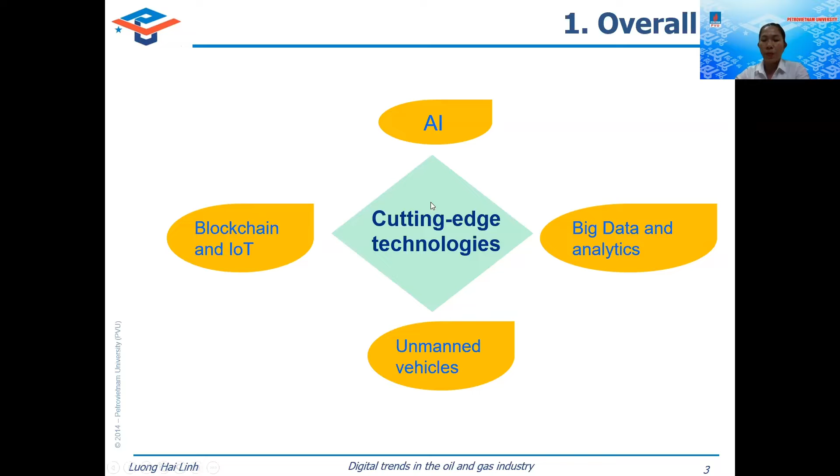Now, as oil price and oil demand are falling, the COVID-19 pandemic is exacerbating the situation, and long-term challenges such as working agendas, budgets, and climate change are overwhelming to the oil and gas industry. So oil and gas enterprises have many pressures and opportunities to improve efficiency and reduce production costs. Through the greater adoption of digital platforms and digital applications, along with the field data generated from existing infrastructure, oil and gas businesses will have a better chance of overcoming the challenges of the future and helping the oil and gas industry continue to develop.

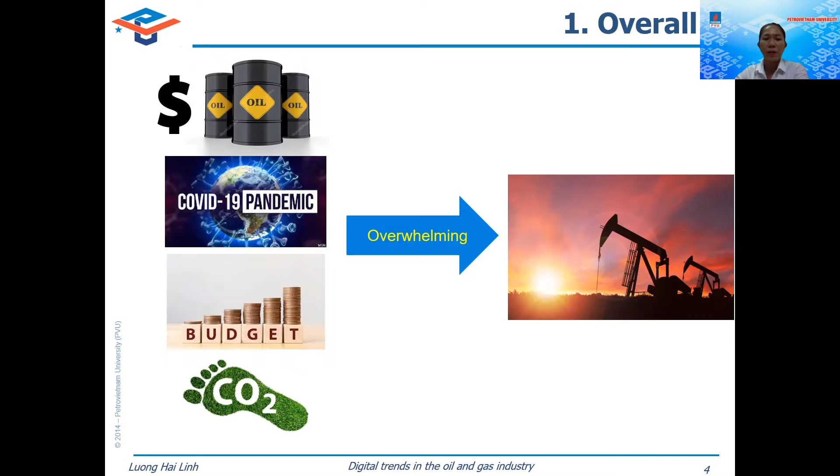So here we have concrete numbers to show obvious benefits of digital transformation, both economical and environmental. According to the analysis of the World Economic Forum in the period 2016 to 2025, digital transformation can generate about $1 trillion for oil and gas companies and contribute about $640 billion to society. Moreover, environmental benefits include reducing emissions of about 1,300 million tons of carbon dioxide, saving about 800 million gallons of water, and avoiding oil spills equivalent to about 230,000 barrels of oil.

So here we can see 6 main benefits of digital transformation in the oil and gas industry: opening up new business opportunities, increasing profitability from capital, improving operational efficiency, managing an aging workforce, and reducing safety costs. And the last one is a quick response to market fluctuations.

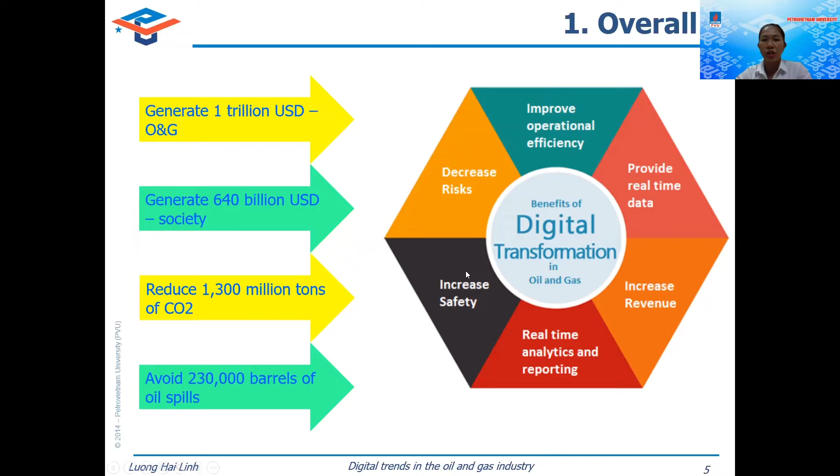So how about the digital trends in the oil and gas industry all over the world? In figure 1, showing investment in digital technologies, we can see that oil and gas companies invested the most in mobile devices in 2016, about 57%, while over the next 5 years, big data and analytics are the trend to be invested the most, about 38%.

Oil and gas companies have invested heavily in fully integrating mobile devices into everyday operations. The major benefits of this integration include workflow improvement from better group communication, increased worker productivity, and better recording of field data. Mobile technology also allows for real-time data monitoring through specialized software on smartphones, and it can have a positive impact on health, safety, and the environment.

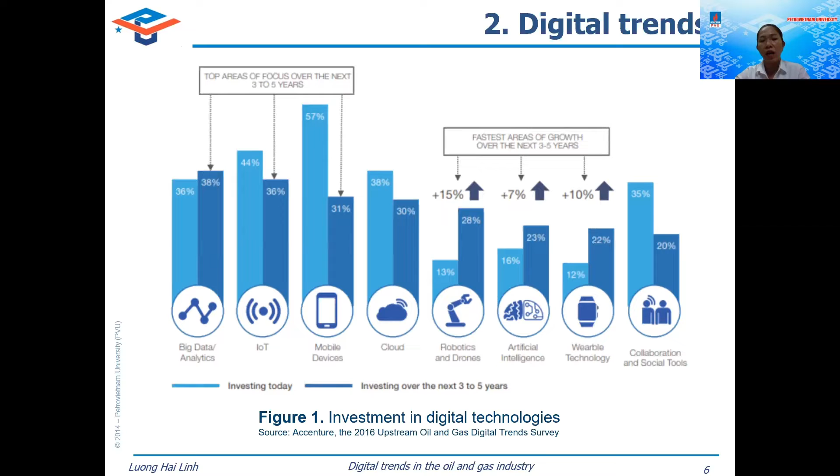Big data and analytics are of great interest in the near future because of cheaper cost and higher computing power. As we know, modern offshore drilling platforms have about 80,000 sensors that can generate 15 million gigabytes of data during the asset's lifetime. So big data and analytics will help oil and gas companies navigate this huge amount of data.

In the first stage of the journey, companies mechanize the process using hydraulic, pneumatic, or electrical control systems. This phase allows players to anticipate and prepare for failures and unusual conditions. The journey then progresses to capturing information from the physical world by sensorizing equipment and transmitting data generated in the field using IT networks. By doing this, an oil and gas company may be able to respond to field conditions and monitor operations remotely.

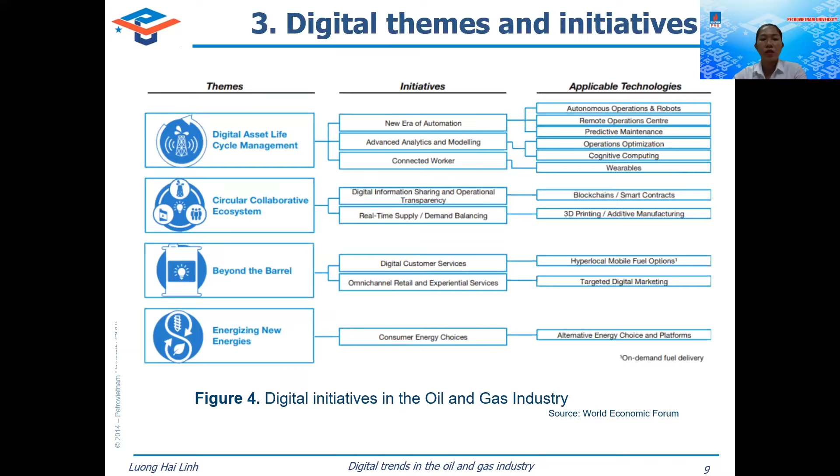And here, as I said before, lower oil prices continue to hamper margins. The oil and gas industry is facing intense pressure to improve operational efficiency. So the new era of automation digital initiatives is built on the application of different technologies like robots, drones, and the development of capability for autonomous and remote operations.

And as we can see, here are some case studies of the new era of automation, such as the robotic drilling system of energy technology in figure 5, and cognitive computing in upstream operations of Repsol in figure 6.

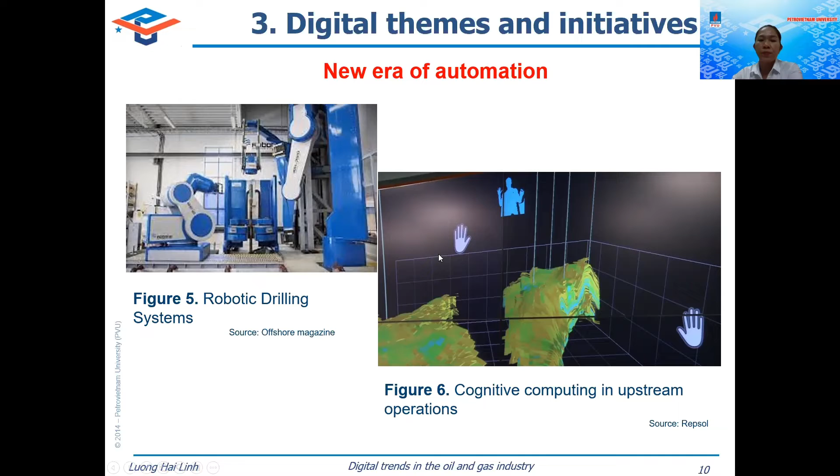Using predictive maintenance to anticipate critical equipment failures, as seen at Apache Corporation in figure 7, and the intelligent pipeline technology of Columbia Pipeline Group in figure 8.

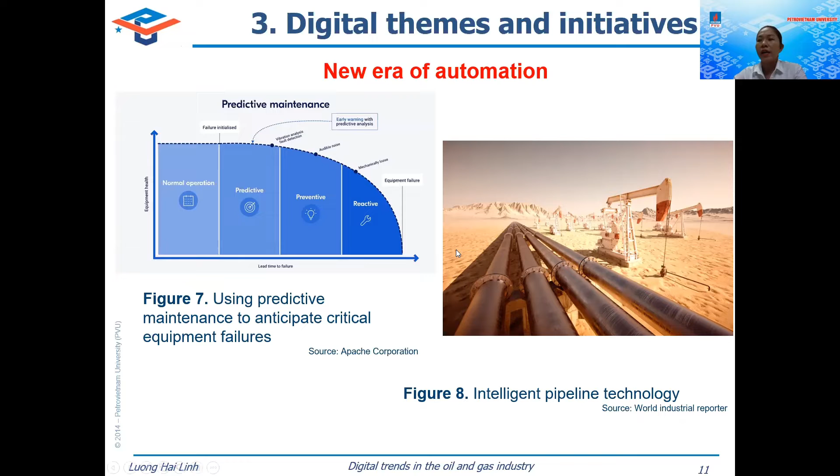Moreover, wireless sensors and personal monitoring systems that indicate when a worker is in danger continue to evolve and improve. Connected workers are employees who are not only empowered with wearables, smartphones, or connected products, but also able to fully exploit the data the device produces to carry out their jobs as safely and efficiently as possible.

We can see a case study of Schlumberger piloting the use of wearables based on Google Glass to improve the safety and productivity of field employees. Or we can look at consumer energy choice in energizing new energy.

For example, Tesla with the Powerwall, storing electricity with Powerwall.

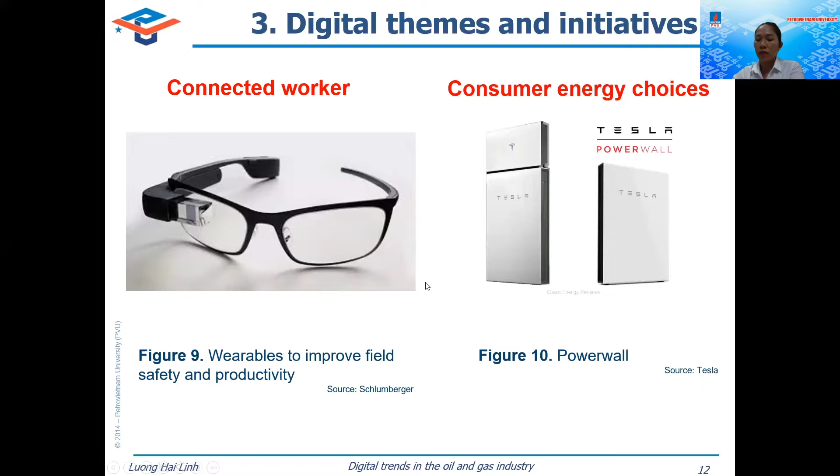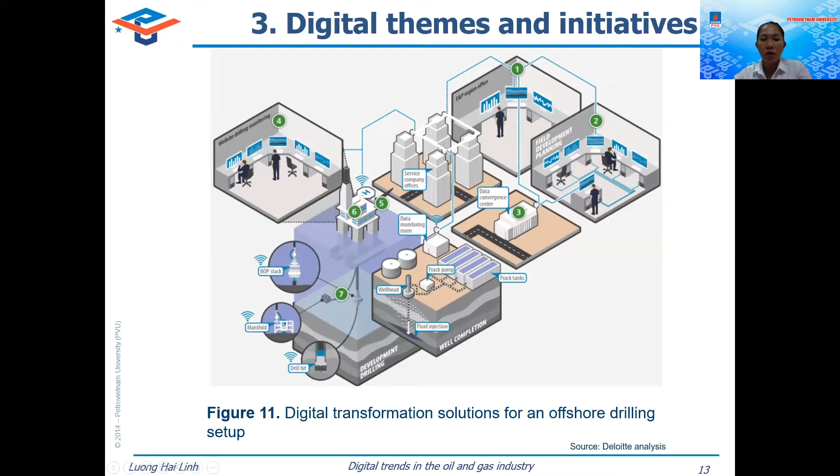So after going through the overview of digital transformation, as well as the DOT models and ideas applied in the oil and gas industry around the world, here are a few suggestions for digital transformation in Vietnam's oil and gas industry.

Stemming from the above analysis, the big orientation in the exploration field in Vietnam is to focus on building a data center for exploration and production. This center needs to fully integrate geological and geophysical data, and also develop spatial analysis tools, applying artificial intelligence and machine learning to optimize the location of exploratory drilling objects in order to reduce risks.

For new production assets, we need to consider the design of a sensor system that collects full field information and conducts analysis. If the field's properties allow, it should be classified according to profitability, with the field having the potential to bring high benefit when optimized. It is possible to consider modernization, installing more sensors for data collection and processing.

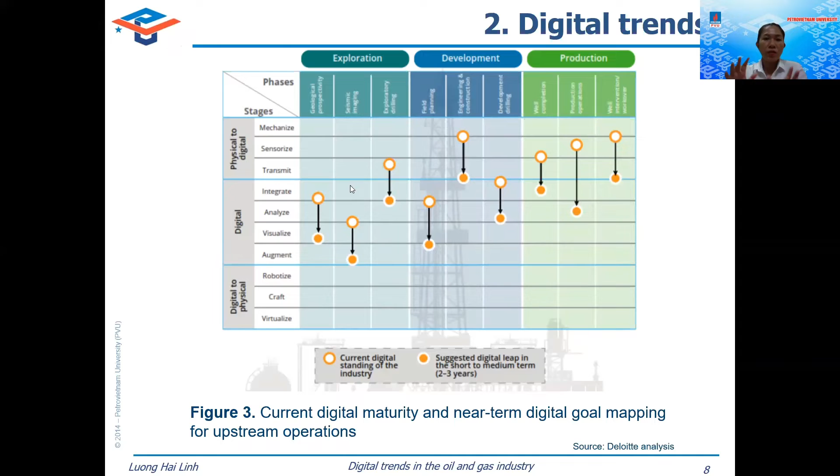Okay, thank you. So, talking about the example of film digitizing the physical asset. As I said before, we have 3 main stages, and the last one is digital to physical. So an oil and gas company could optimize its physical operating environment and adopt new capital models in these 3 stages.

With the stage robotized, we deal with problems such as tough, riskier operating environments in offshore locations, such as rigs, platforms, FPSOs, or underwater installations. The solution here is robotization of platforms. An example is Woodside Petroleum, which is combining its cognitive science technology with NASA's humanoid robotic system, using it to ultimately design offshore facilities for robot-only interventions and operations.

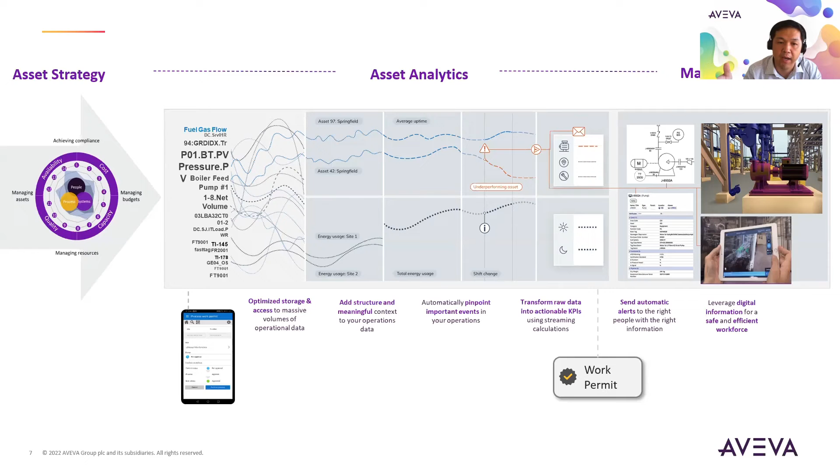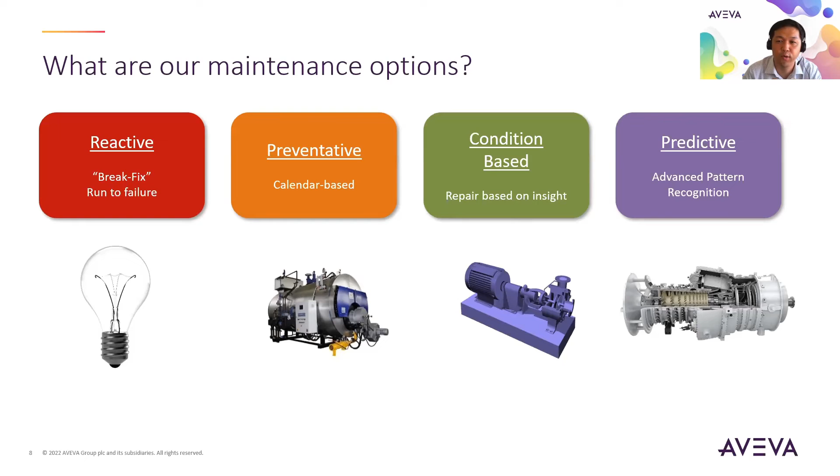Once you have data on the assets you're monitoring available in an accurate manner, we can look at changing or modifying your maintenance routine based on the condition monitoring of those assets. When you've collected enough data on particular assets, we can supply that data into an advanced pattern recognition application that gives you potential faults that could happen in the future. So you can incorporate that into your strategy, so you don't have to over-maintain or under-maintain, which would otherwise give you either downtime costs or absorbing maintenance costs.

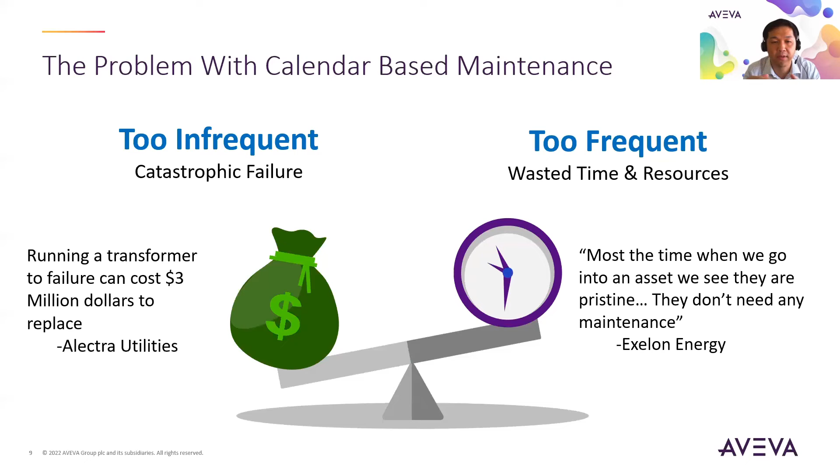If you haven't moved into conditional-based maintenance, or CBM, this is the challenge you face with calendar-based maintenance. You're looking at either too infrequent maintenance, which leads to catastrophic failure and massive downtime that could cost millions of dollars to replace and bring the operation back up, or too frequent maintenance, which is sometimes just a waste of time and resources on assets that run perfectly fine, where you're doing maintenance and bringing it down for safety or preventative reasons. This is the balance we're trying to strike with our customers - what is enough? That's the key question we look at by utilizing the software and the data they have.

So this is really what we're trying to find - the sweet spot for our customers to reduce maintenance costs, to find the middle point where there's enough maintenance for the assets to run perfectly, for the equipment to run smoothly, reducing downtime to a minimum, as well as improving overall equipment efficiency, or OEE, so the equipment can perform at maximum capacity to drive the best business value.

At the same time, we're capturing the knowledge of the assets along with the aging workforce, where we can use data to simulate what the equipment will be running, and allow the next generation workforce to come in and learn about the equipment without actually being around it. So that's essentially what we're trying to drive with this product.

So what I'll do is give you an example of what we do with our analytics. Under AVEVA, we have a lot of interfaces and connectors that allow us to connect to the data source in the control layer. This is not restricted to oil and gas - we have connectors for common protocols such as PLCs, OPC servers, and also some IoT devices.

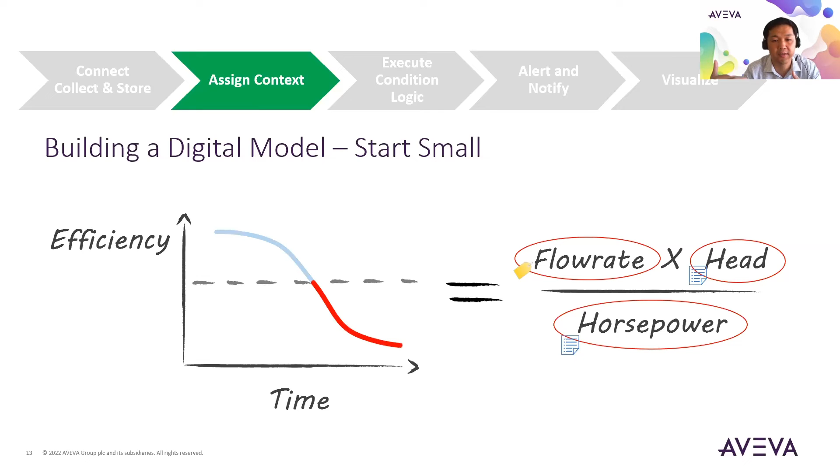And that's quite important to us. We want to build that into a logic, as well as a template that can apply across multiple assets of the same type or the same manufacturer.

So over here, we're basically looking at a pump template with the attribute and property of the status of the pump, which includes the runtime, how long it has been running. And then we also have the data coming from the plant, which is discharge flow rate, as well as the OEM data that comes from the total heads, as well as the horsepower that it can produce.

And with these parameters, we'll be able to calculate how long the pump has been running and what is the efficiency over time.

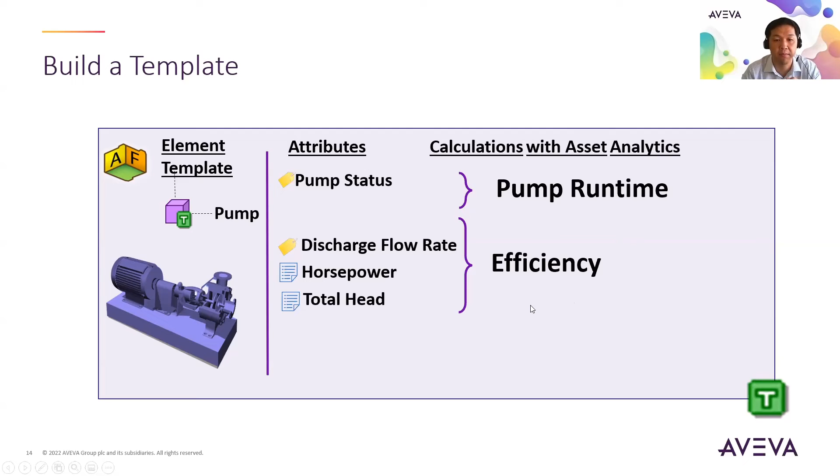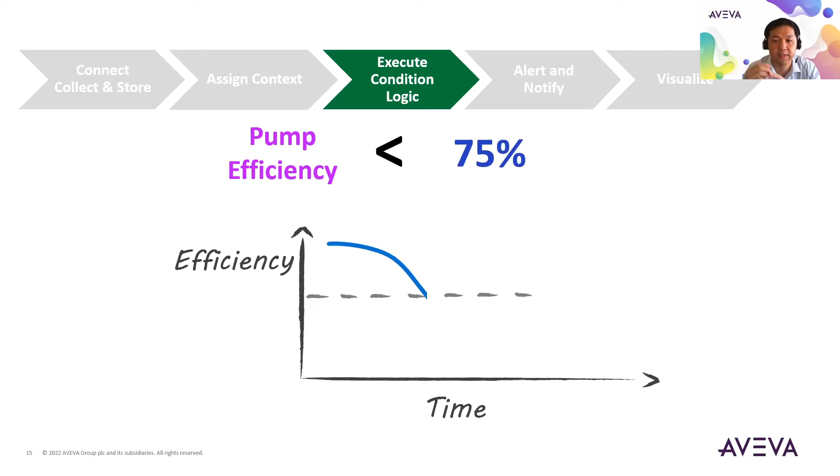So once we have that calculation built into the PI System, we can actually design or create a pump efficiency as a threshold or set point, where we monitor this particular equipment's efficiency until it drops below 75%.

And then when that happens, we are looking at capturing that particular time and bookmarking that time where it's considered a PI event frame when the equipment has been performing under what it should be.

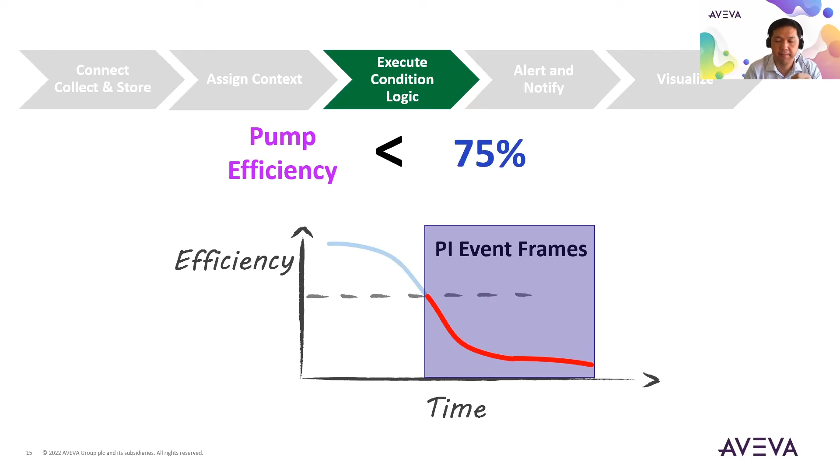And then writing the logic is really simple, using the element or the template that we have as pump 01. We've used the attributes pump status, the flow rate, and the horsepower and total heads, and produced the analytics that includes the run hour, how long it's been running, and what's the pump efficiency in real time.

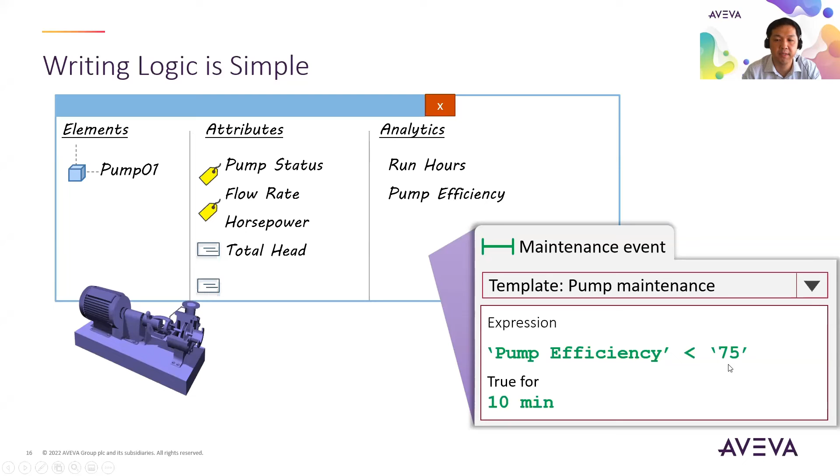And then through the event frame we are looking at the expression of pump efficiency. It goes below 75%, and if it's true for 10 minutes, we will capture that event. That's basically how we build a digital model and execute the logic behind the model.

And then final stage, when this does happen, we want to notify someone to look into it, or notify a system to look into it as well.

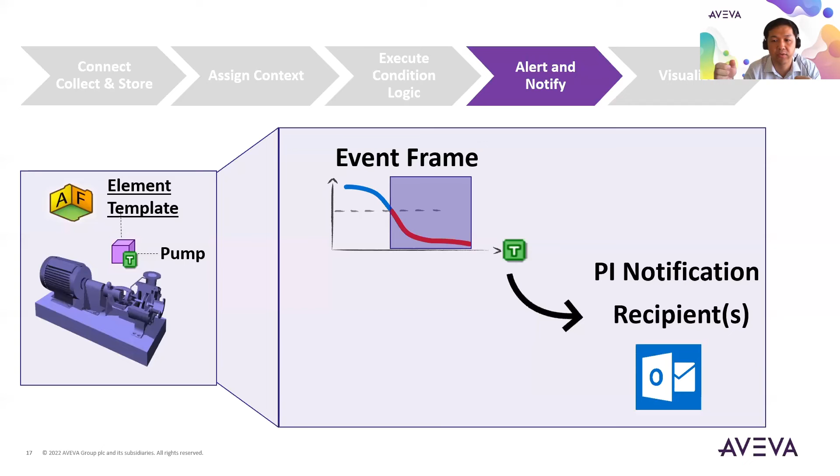And once we build this logic and the model together, we apply the template to all similar assets. This basically propagates through all the assets that you have of the same type of equipment. Then you have a whole fleet that's being monitored by a single template that's based on the same digital model, as well as the algorithm that monitors the efficiency of this.

And going a bit further, we are using the notifications that contain specific data to the assets and pass that information to a computerized maintenance management system, that could be SAP or IBM Maximo, where it actually stores the maintenance data or triggers a work order to implement for the future, for the maintenance team to execute later.

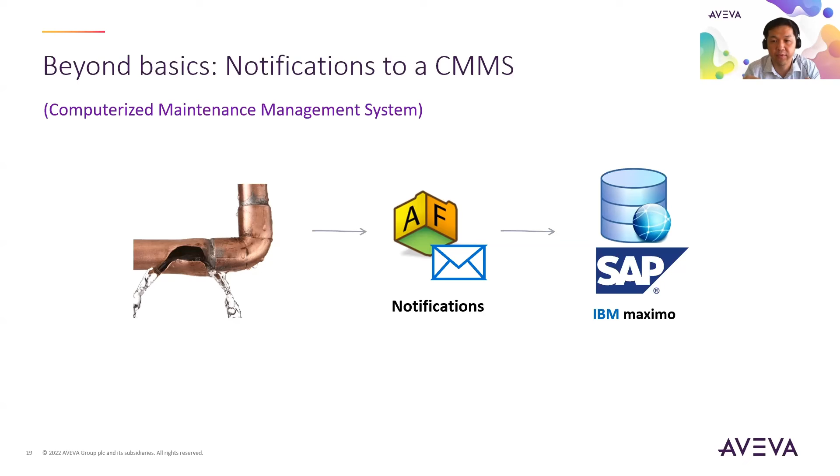And the same thing can happen vice versa. We can actually bring the runtime that may be stored in a CMMS back to PI. So there's also bidirectional synchronization between the two systems that kind of helps improve further your maintenance strategy.

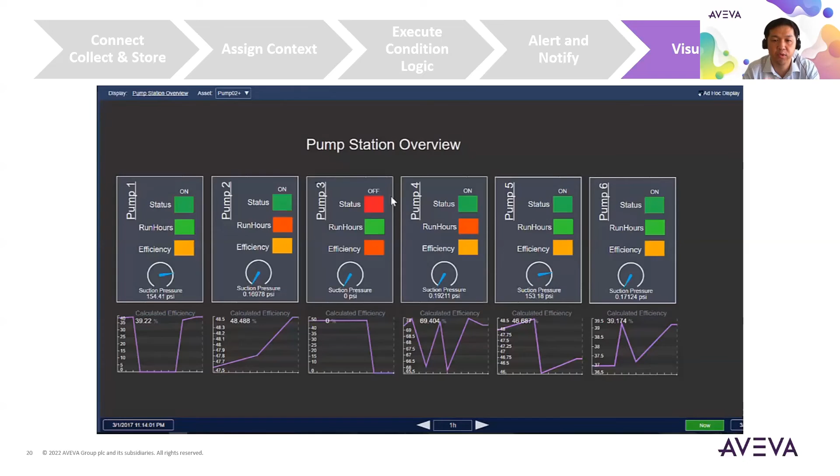And overall, in a few very simple steps, we are looking at an overall visualization of your pump station that contains multiple pumps running the same parameters, so you can look very quickly in the visualization platform at how your pumps are actually performing.

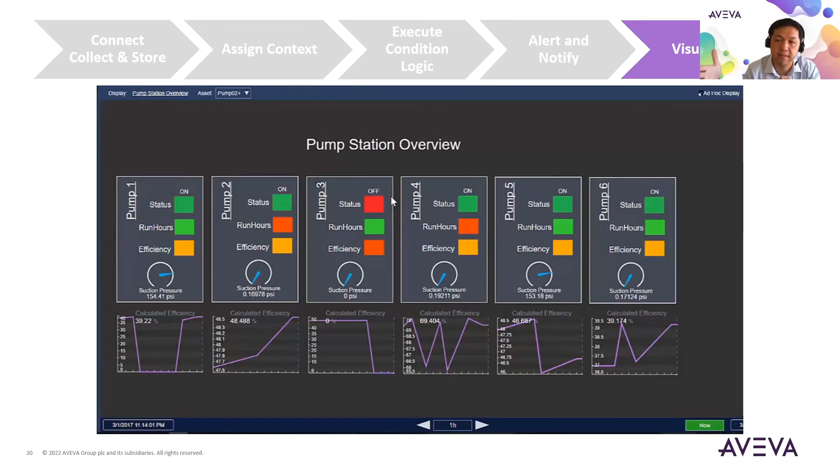And this also applies the same way. The pump station can also be templatized, and this can be applied across your whole site, or multiple sites, or across regions as well. And this is the same with your oil and gas plant refineries, where we actually have multiple pre-built assets available for you to look into.

So that is starting from scratch. What we have just covered is really the industrial information management layer. So on the operational side, we have the analytics that allows you to build from scratch if you don't have it already, and you can build your digital assets very quickly and ad hoc for your visualization.

But in the overall scheme of the Aveva portfolio, we do have asset performance functions specifically to help you monitor your assets. So what we call the APM, Asset Performance Management Blueprint. And what I've highlighted here is really the different components in APM that help you drive your asset maintenance strategy and execution.

So overall in APM, we have the asset strategy optimization. This really helps you align your asset strategy with your enterprise goals, which assets are critical. We have SMEs that work with you to look at whether your current asset strategy is optimized to what you want to do.

Once we have that, we have configured the asset analytics which uses a predictive AI-driven algorithm to do analytics and give you early detection of faults. This is artificial intelligence and machine learning driven, giving you alarms and notifications around potential faults by analyzing operational data versus forecast or predicted data, looking at the difference between whether your asset is operating within its means or outside the operating window. This gives you good insight into whether your assets will perform well in the future, versus how they are performing in real time.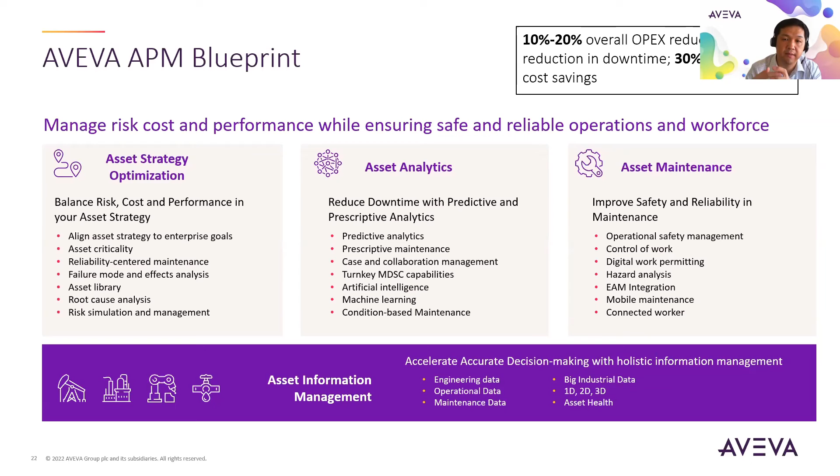So with all that combined, we are looking at connecting all the analytics together. What I showed at the beginning is condition management - you have your current real-time data stored in the Pi system that enables you to do condition-based monitoring, which helps you collect the asset condition data as well as automatically generating work orders for execution.

The second part we're looking at is the predictive asset analytics that helps you continue to feed real-time data coming from the Pi system and allows the AI-driven algorithm to predict future faults based on the difference between real-time operating data and predicted data. Once you have that, you can send alerts and create use cases that allow others to act on as well.

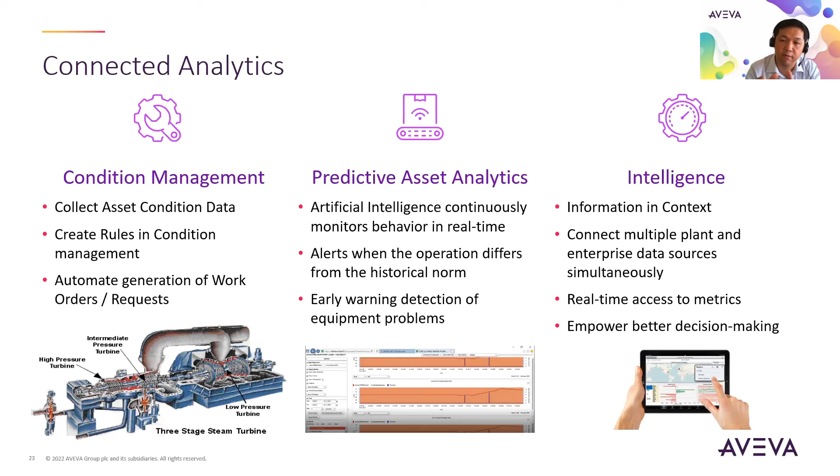And then the other thing we're looking at is AIM, asset information management, where it gives you the whole context - everything around the equipment including the operating data, forecast data, 3D drawings, etcetera. This basically allows you to look at everything around your assets in a single platform.

Once we have that whole holistic view, we're able to convert the PID drawings into 3D models, such as what you see here, and prepare your design for operation. So there's a smooth handover between the engineering team and the operating team, between using the AVEVA engineering tools and the Pi system.

We also have the application that connects workers to do manual entry or issue work permits, and also allows other users to work remotely or from an iPad. So our tools are basically connecting everyone from on-site all the way from design to operation, as well as those in the office. The whole applications are built together to enable everyone from top to bottom to see the assets in a single point of view. And this is just the AVEVA portfolio.

So with the OT and IT convergence, we are looking at connecting visualization together between different systems as well. We are looking at connecting the ERP, the CRM, as well as financial data within your operating environment, as well as the engineering design environment.

So over here you can have a whole panel that shows everything that you are monitoring within your corporation, basically combining your people, the information you have around the assets, as well as the work process together. Essentially we bring it all together into a single source of truth that allows you to look at your data, not only from a data point of view or asset point of view, but also geographic point of view, and videos as well.

So this basically combines all your analytics, all your algorithms, all your asset information into one single pane of visualization, and this gives the entire enterprise the same view on everything.

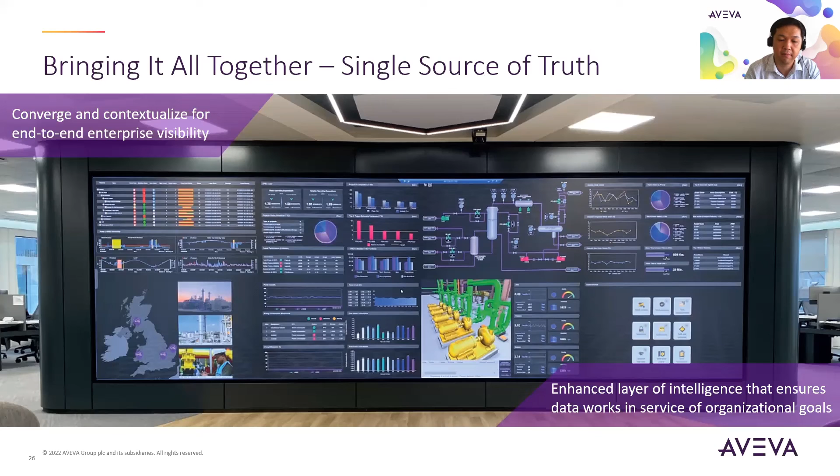So one case we have is SCG, who basically worked with AVEVA to create the digital reliability platform. This is one of their initiatives around digital twin to actually monitor the assets across all 15 plants, and that is the end goal - how can they improve efficiency, reliability, and safety across all plants?

They are basically working with AVEVA to bring information from the operating data into predictive analytics. This allows them to create a platform where they can view all the assets across all the plants. This won the hydrocarbon processing award for the best monitoring technology out there, and this is one of the examples of how we help our customers not only improve their work processes, but also monitor their assets.

The next section is also Petrobras, which also uses technology as a strategy to drive a connected workforce. Petrobras has many FPSOs around different parts of the world. So how can we utilize the technology on board as well as offshore technology to connect people remotely to monitor their assets? This is actually utilizing AVEVA technology as well as products to enable workers and issue work permits to allow them to work on site based on the conditions they have offshore.